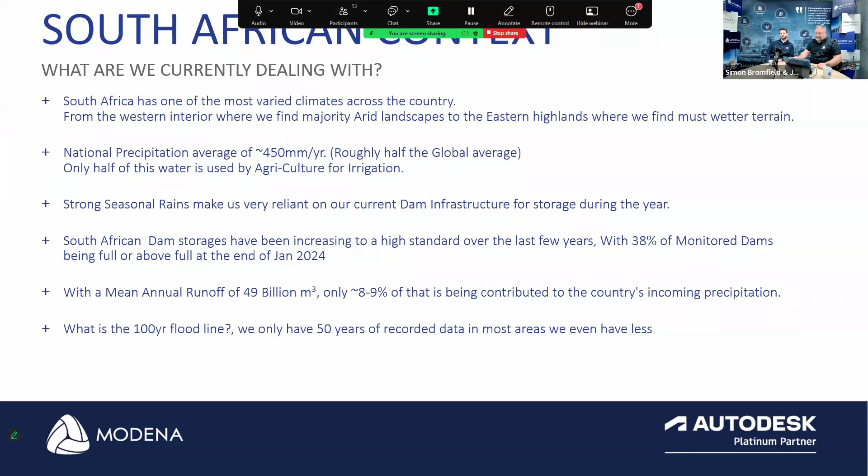So let's talk about what South Africa is dealing with today. I'll hand over to you, Jason. What are your thoughts on this? What are you thinking about? Great. So what I was thinking about is let's actually start looking at what we are dealing with, what we are actually working with, because this is obviously going to then move over into what we can actually start looking at and fixing. Now, as we look at the country as a whole, we know we've got such a variety of climates and ecosystems that are happening.

If we go from the Eastern Cape all the way through to the West and even up to the North, we have so many different ecosystems taking place that when we look at a concept of design, it is actually going to be dependent on which ecosystem we are working within, because that's going to require different solutions because we have different challenges in those specific areas.

Now, generally, if we look at stormwater as a whole, our national precipitation is half of the global average. So it's not that we're actually sitting in these extreme weather conditions where we need to be going into the extremes of drought or flooding. So we have actually got a good middle ground that we are working within, where we actually have freedom to move, where we don't have the high extremes or the lows that cause more technical challenges to the solutions. So we are now looking to actually get a more consistent water provision throughout the year.

Yeah, it's interesting that you say that, because if you speak to a Capetonian today, they're drowning. I mean, they've had so much rain this week, it's frightening. I was looking on TikTok this morning, the whole of Pinelands is underwater, and we've seen these major storm events, like in Durban and the Eastern Cape, the Bisho Dam overflowing. But are these really uncharacteristic flood events, or are they just things that we haven't seen in our time?

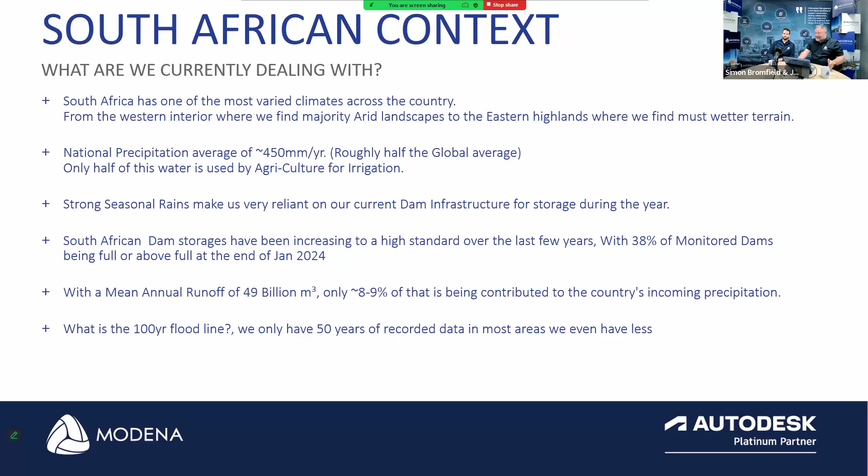So let's talk about some of the obstacles to the flow and some of the challenges. Let's go a little bit deeper into it and some of the things you've seen, Jason, in the work that you've done. Definitely. So the first thing that I was looking at is the growth and development that's currently taking place within our economy, which is fantastic. We need this. The country is growing at a fast rate. But with this development, obviously comes impervious cover, which is point number one. So as we look into the sustainable design, we need to start at point one. It doesn't help that we look at how we are currently working with current infrastructure design and just try to change that midway through the process. We need to be starting a lot earlier.

So for a dumb person like myself, what does impervious cover mean? Great question. So impervious cover is referring to any surface that gets closed off where water cannot penetrate and actually drain through that substance. So that will be our roadways, your concrete, parking areas, your sidewalks, all of those rooftops. Correct. So we have this water that's actually falling down, but it doesn't directly fall in and saturate into the soils naturally where it falls. And that's what's causing the massive runoff events that we've got, because the water is not going anywhere. Correct. It's literally running straight into the stormwater.

Correct. And like we all know within the country itself, there is a lot of old infrastructure that needs to be revitalized and upgraded. So now with this development that's growing exponentially, that tends to lag a little bit, where we expect existing infrastructure to function like it does. And a lot of the infrastructure in our country at the moment is working anywhere between 50 to 70% capacity of what it was designed for; it's not actually functioning correctly. So I think that's point number one. The less impervious cover we can develop and create, that's already reducing the problem from step one.

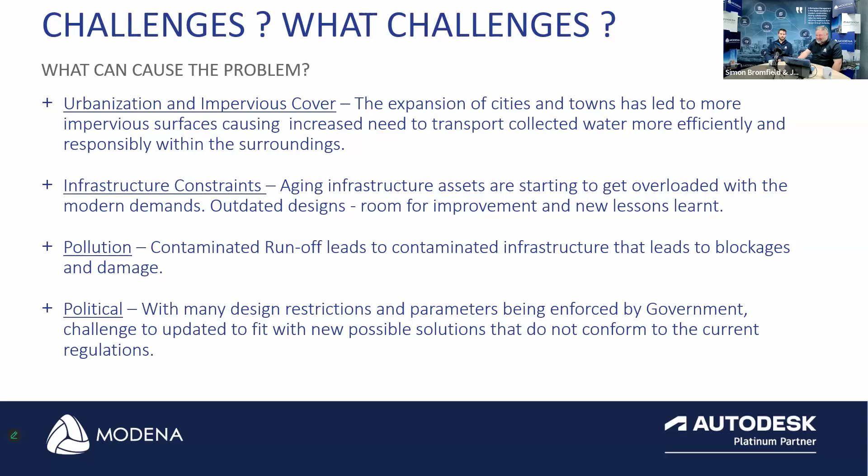So the amount of work that they put in and utilizing proactive design has now cleaned that river to the point that people can now start using it again, which is an incredible story and something that I was following this week on social media. Sure. So let's talk about, what can we do around the utilization of proactive design? What can we do to make things better?

That's why I think software plays such an important role. If you've got the right software tools that are able to integrate all of these functions, you're able to see the knock-on effect. And we talk a lot in previous presentations around upstream and downstream of the work that you're doing. What is the impact? There we go. And this is very important from that side.

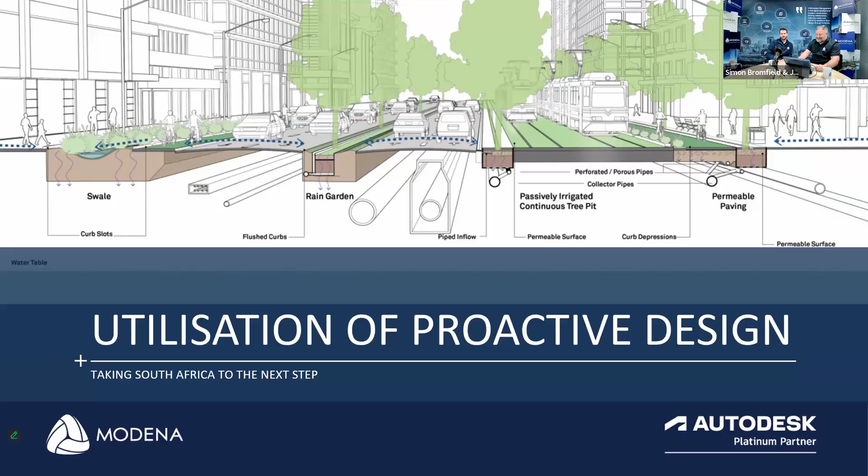Okay, then let's look at the challenges now. You've got a whole lot of acronyms here. You are going to have to explain these to people, especially to me, because I have no clue what a SUD is and what a WAD is and all these things. But let's start with water sensitive urban design. Yeah. So like Simon mentioned, these are just acronyms within the industry. Many of these are actually technically country specific, where they've started looking at sustainable design and come up with their own phrases. So with regards to the WSUD, that's actually an Australian-based terminology, and they refer to it as water sensitive urban design.

What the WSUD is actually looking at is a holistic overview. So this is where we are looking at stormwater within all the other disciplines and how does it fall within the project itself. Okay. So we're not going into any details at the moment. Project location is what we're looking at. How does the building that is going to be built fit onto the site? Yes. And how does that intertwine with the stormwater elements, your drainage ponds or a bioretention dam or stuff like that? And this is more green, correct? This is like thinking of how to green a city.

Correct, yeah. And I know that Autodesk has been investing a lot of money in this at the moment. And if we look at the new direction that they've taken with InfoDrainage and all the technologies, this was a big focus for them as well. How do you start building in your water sensitive urban design so that you can manage green water? That's correct. Because once again, with the holistic framework that we're trying to aim at, I'm glad you mentioned Autodesk because we're all looking to go to sustainability and reduce our carbon footprint. And this is exactly the first step towards that within the infrastructure side: how can we reduce the carbon footprint of that infrastructure by incorporating it back into the natural habitat.

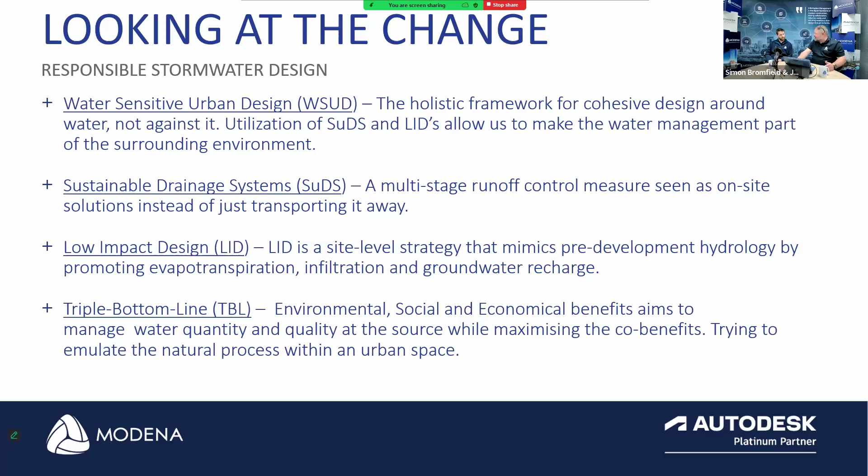Yeah, because that's what businesses want. They want to be able to say, I've done this return, I've got my carbon tax offset. This is very important for the new economics of where we're going. Being able to take that feeling and quantify it into a black and white value. Yeah, always important. I get you.

So we've spoken about how it affects other countries, but how does it fit into South Africa? And this is where I wanted to start challenging the audience a bit. That's also why I took a moment to look at the picture earlier, because we've now started looking at the information. What are we dealing with? What is today's discussion about? I want the audience to start thinking about how this could actually be implemented, because we've seen all these wonderful things being done in the UK and Australia.

But we have our own challenges that we saw earlier. So one of the main ones is, how would a swale channel be implemented onto a major arterial road, like a highway? I was speaking to one of my colleagues this morning, and imagine being able to drive on a highway and you just have this luscious environment around you. Your stress levels will go down because everything's nice and green. You'll see all the little pretty flowers. But at the moment, we've got all these concrete channels and linings, and it becomes very industrial.

And I think that is something that we need to look at, because, like I mentioned earlier, with regards to the saturated soil and the road layer works, how are those two going to be working together? Because there are going to be construction limitations we might be running into, because the layer works might start eroding away because we have so much saturation. So this is what I want the guys to start thinking about: how can we actually start implementing this in our current designs and then improve on that in the future?

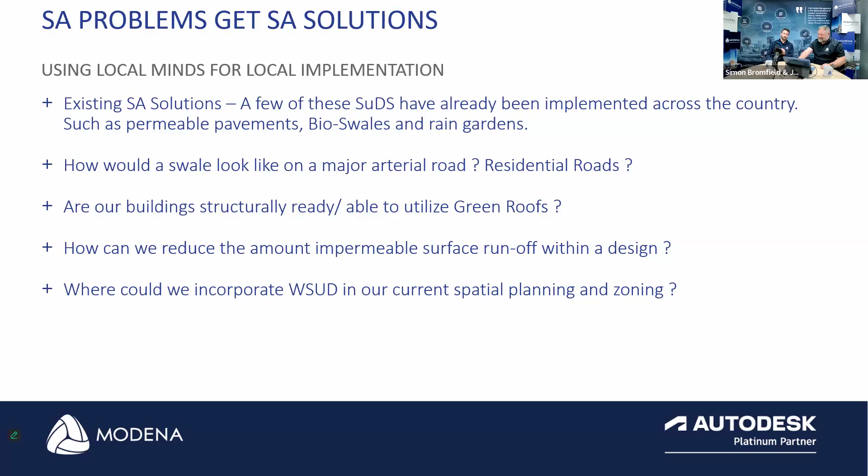Cool. Then let's talk about making the most of design. I think that's why we're here today. We design people, and that's where we focus. So talk about the cohabitation through design. What are your thoughts there? Yes. So, like you said, we're looking at all these problems, but what is the solution? What is the actual change that we can start bringing?

So, once again, it comes back to our SuDS explanation of how we are trying to take stormwater management systems and infrastructure and phase them over multiple stages, because that lessens the load on each stage individually, but then also making it a workable environment, whereby you can actually walk over a nice little pier that is being utilized as a bioretention dam. So getting back to the core principles of allowing the SuDS to do its job. Yes. So that we can actually see these changes happening.

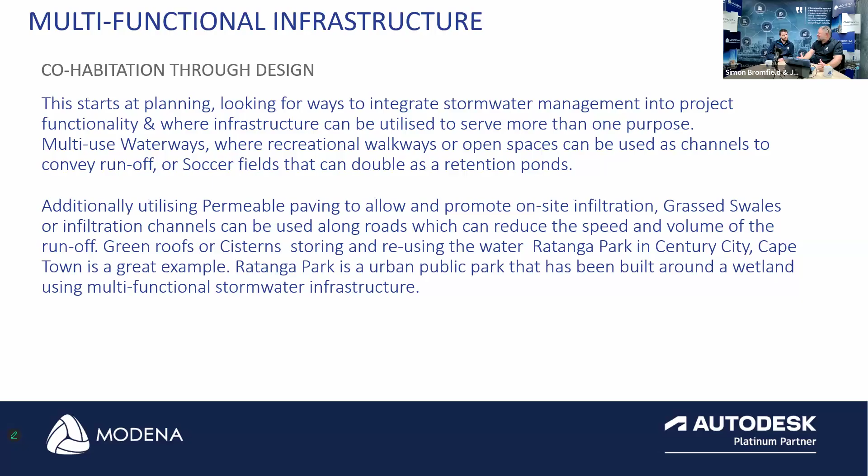But with that being said, there's being responsible with pollution elements and stuff like that. So with all of these new things, we also need to protect their function, because not everyone is aware of them at the moment and how they function. And as a society, we need to train everyone and teach them what these are. Yeah, it's not the focus of today's discussion, but we've talked about pollution control and how to track where pollutants are coming into water networks. And there are such good tools out there now to do it, so you can actually manage what you've got.

But I think it's very important, because from a technology point of view, there are so many different ways to get to one answer, approaching it from so many different ways, but it's not necessarily the best one. We're looking for that efficiency. We're looking for those deliverables that we can trust. So we need to find those right tools.

Yeah. And this is where something like InfoDrainage would come in, because this is what it was made for. We have the implementation of all of those SUDS elements, like our swales, our bioretentions, our permeable pavings, all of these different design factors that we can use. And this is what the software is there for. Yeah. It is allowing us to then start looking at these factors.

Yeah, no, I think that was what really attracted me to the product, and what really got my mind going was that today with all of these products, and we'll show you the breakdown of them just now, but with InfoDrainage, I'm able to replace 5 or 6 different products I was using in the past. I don't have to break out to do something different.

I don't have to go into a piping tool for something else. I don't have to go into something to do this. And I don't have to add a plugin to do that. Or you have to open up an Excel spreadsheet just to do this one calculation check. Yeah, it's all in the software. And that to me is really, really the power of the solution.

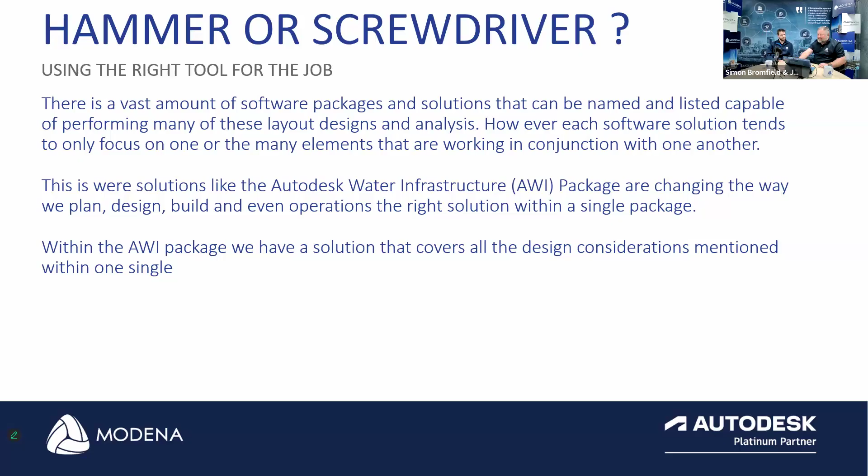And I think one of the things that Autodesk has been very good at is thinking about not only water infrastructure. They think about all of the projects around it. And I think this next slide really captures that. It talks about where we are, what role we play, and which products fit into each of those roles. Yes. And I'll just quickly go through the slide, and Jason, you just jump in at any stage where you think I'm forgetting something.

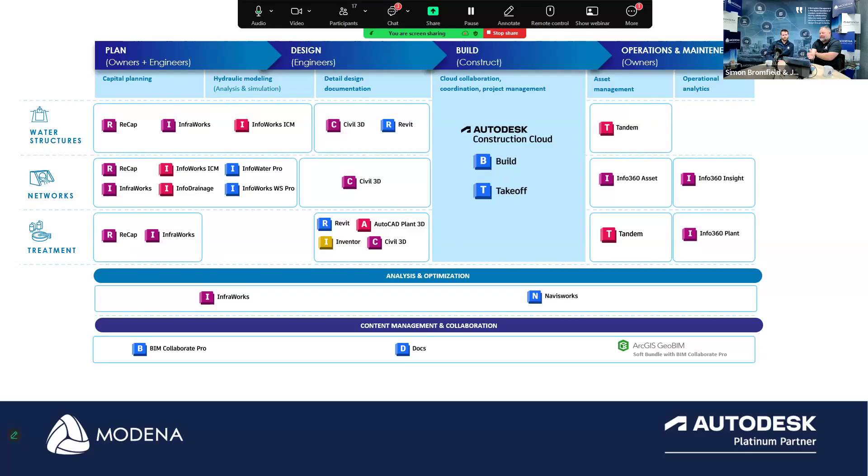But the way that the solution has been put together is that for every type of person that gets involved in a discussion, whether it be an owner, an engineer, construction, the handover, the final project, everything has a tool and everything has a workflow and a handover point from it. So for instance, water structures, water networks and treatments, you can see that Autodesk have products and services that fit into every part. So if we do capital planning, we have the tools to do that. Exactly. It's made for that.

Yeah. Exactly. So if you wanted to go and take an asphalt product that's already there, a structure that's already there, we have ReCap for scanning it. We have InfraWorks for doing your infrastructure design. Yeah. And then you've got ICM, which is going to do your planning and your hydraulic modeling. So there's products that allow you to fit in everywhere, and everything is interoperable. And that's the thing I love about it the most.

From a technical point of view, at the moment in the industry we've got this massive boom with new technology coming out. But as a technical guy, I need to be able to take information from one point and manipulate the data within all the different aspects. And that's what I love about not just specifically the Autodesk products, but these products as a whole: that interoperability, the smooth transition of taking data from here, putting it over here, and using it in the next design element. And that's another thing that's so underrated at the moment.

Yeah, and I think that's where the work is, when we talk about network design, where we talk about Civil 3D and all of the products. The handover between the Autodesk water product and the Civil 3D product is completely seamless and bi-directional. Oh, yes. So as you're changing something on one side, it's changing on the other, and you can see cause and effect as you go. Directly, yeah. And the beauty of that is everything is then linked together.

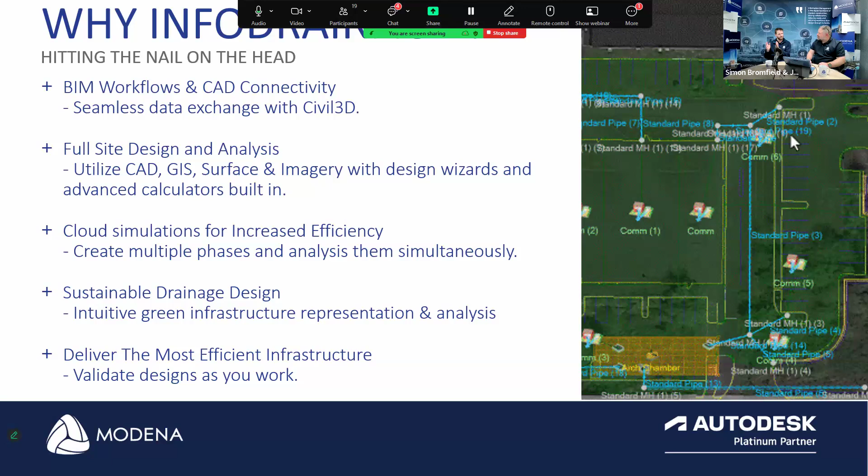So just being able to, once again, take the information and visualize it with the different software. If you need to double check an answer that you're not too sure about, but you trust the software a bit better, you can then do that.

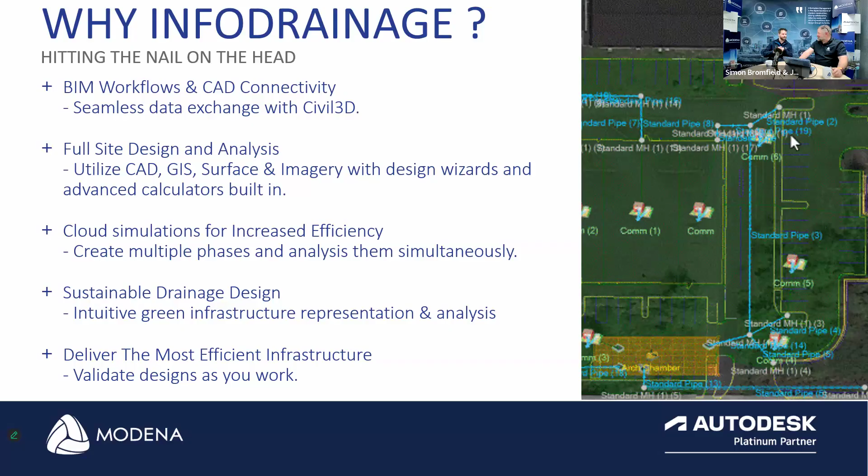So let's talk about what you say, you're hitting the nail on the head. So first off is our visualizations, as well as the overland flow corridor. This is where we start looking at the sheet flows. How does the software take that mesh, divide it into the cells, and actually run these computations? And then being able to take these numbers and binary values and have a nice pretty picture that we can give to the stakeholders or back to the clients, so that we can take this analytical answer and present it to someone that might not be working with analytics on a day-to-day basis, who is more of a visual person, so that they can understand it a lot better.

Then we've got the streamlined design process. So with regards to not InfoDrainage specifically, a lot of the Autodesk products, we've moved away from just having the tools in the software application and more looking at the workflow. This is where we start, this is where we need to be at step B, and this is where we're working towards. And the software is catered to be a lot more workflow orientated. So the software package has actually been set up in that way with your tabs to go from importation to design, then to export. So the workflow and the user access is a lot more streamlined and easier to use.

And sorry, yes. Yeah, you're talking about intuitive green infrastructure. Now, to me, if you're wanting to build your green credibility, this is where you do it. Oh, definitely. Because this is where you can have the highest return. It's rain, it's everything that you can use. Yeah. So I think having that in it, and the focus that Autodesk has put on this, is really good for our customers.